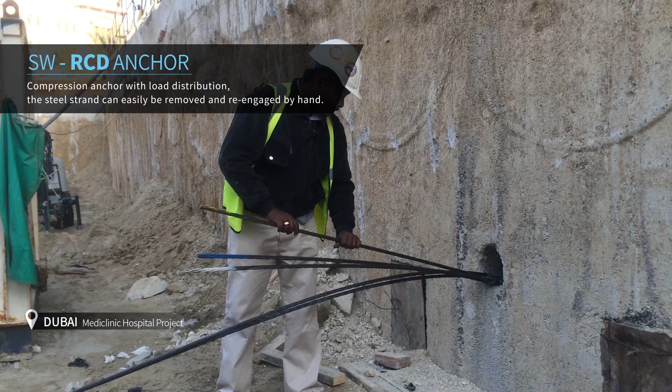Ground anchorage is used at a construction site to support structures using the tension of steel strand in sheeting and shoring at a work site. SW-RCD Anchor is a removable anchor with the steel strand that can easily be removed and re-engaged by hand.

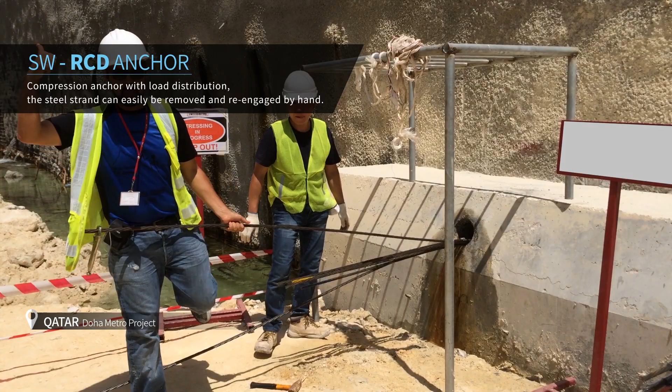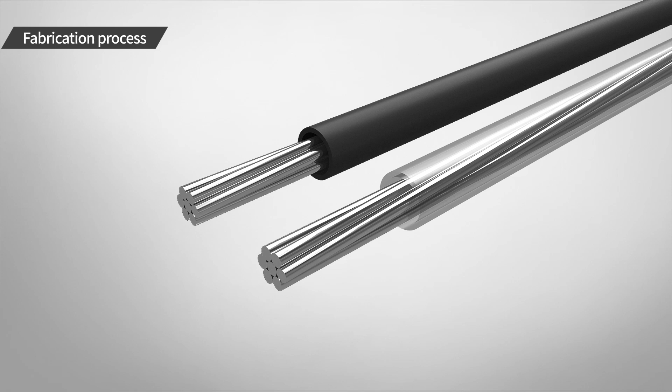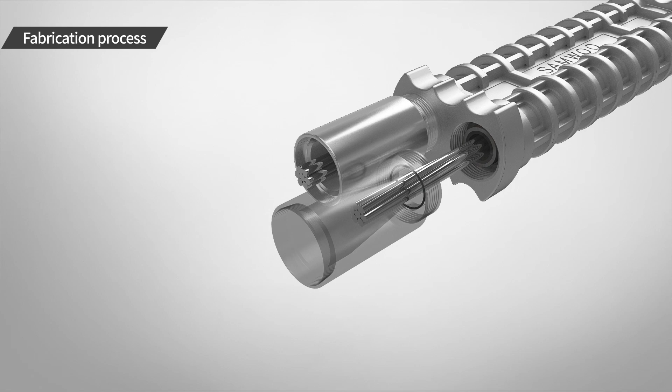RCD Anchor is a removable compression anchor with load distribution. Its composition and removal method are as follows. RCD Anchor consists of steel strand as a tension member, corrosion-resistant aluminum die-casting anchor body for load transfer, PE ring for waterproofing, and anchor block for holding removal wedge.

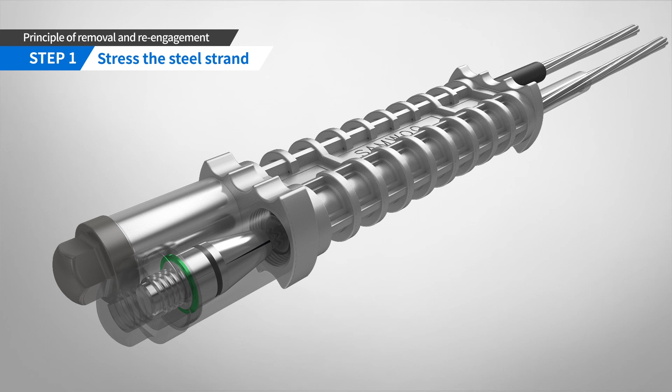To assemble the product, first the wedge is inserted into the anchor block to fix the strand and then fixed by a screw cap. When the steel strand is tensioned, the safety ring for preventing the recession of the wedge will be removed in the direction of screw cap, and the steel strand will be fixed with the removal wedge in the anchor block.

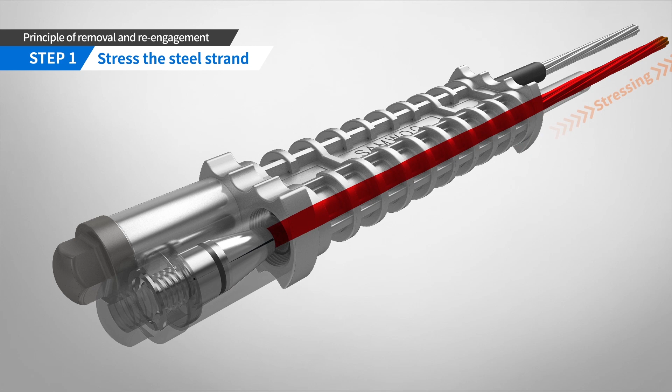The steel strand can be removed as follows. After de-stressing the steel strand, rotate the steel strand counterclockwise to release the wedge from the anchor block and open the wedge. Then, remove the steel strand by hand.

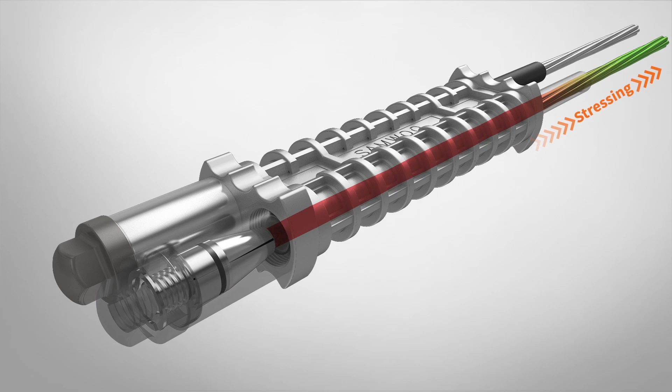If replacement of damaged steel strand is needed, you can re-engage the steel strand. For re-engagement, insert a new steel strand into the RCD anchor and rotate it clockwise to re-engage the steel strand with the removal wedge. Then, you can re-stress the anchor. Samwoo produces lineups of RCD anchors suitable for diverse anchor body combinations according to installation site requirements.

The load transfer mechanism of RCD anchor is based on the load transfer mechanism of the compression anchor. The ground anchor is largely classified into tension type and compression type according to technical criteria. The load transfer mechanism for those anchors is as follows. For tension anchors, during the stressing process, load will be applied via the steel strand, and the load will be transferred to the grout through the bonding area between the bare strand and the grout, as a result delivering load to the ground.

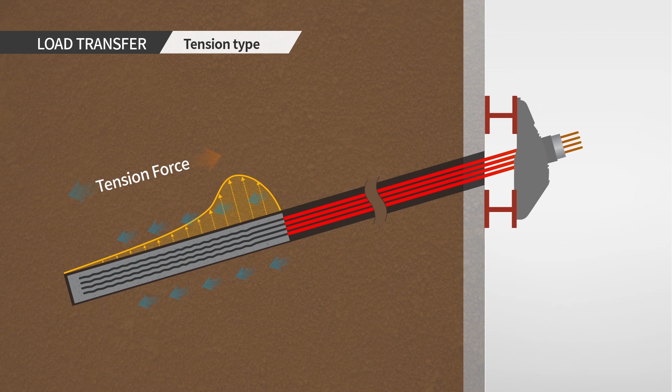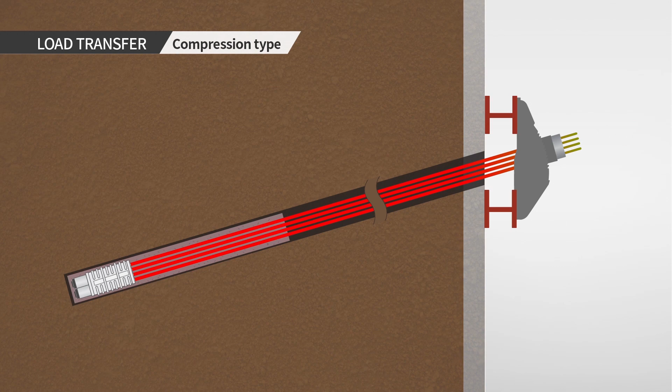For compression anchors, during stressing process, the load will be applied via the steel strand and the load will be transferred to the grout through the anchor body by the compression to the grout, hence delivering the load to the ground. For these anchors, there will be higher load concentration on the load transfer area of the bond length, hence causing anchor failure due to progressive debonding or the grout failure.

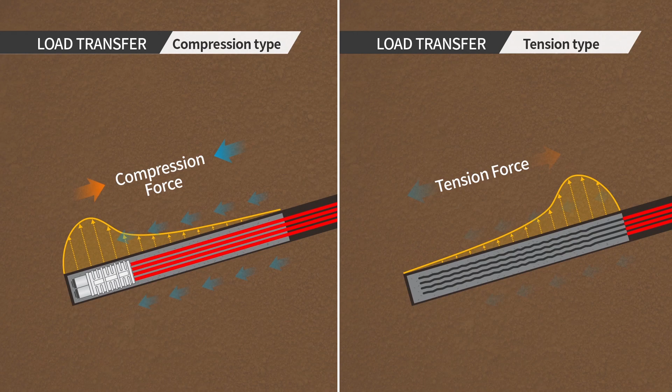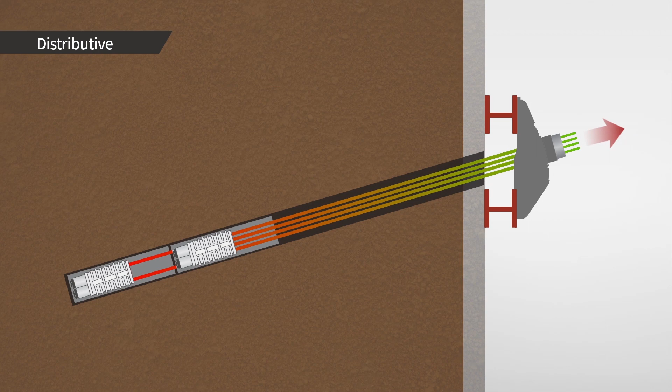Samwoo RCD Anchor is an effective anchor system with better performance to minimize these problems since the load is distributed to several anchor bodies and load can be transferred evenly throughout the whole bond length of the RCD anchor with load distribution.

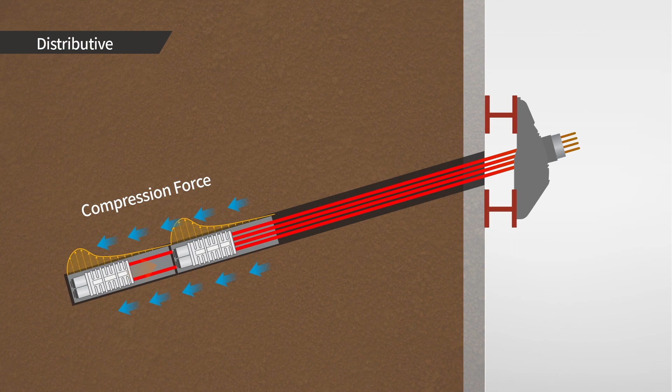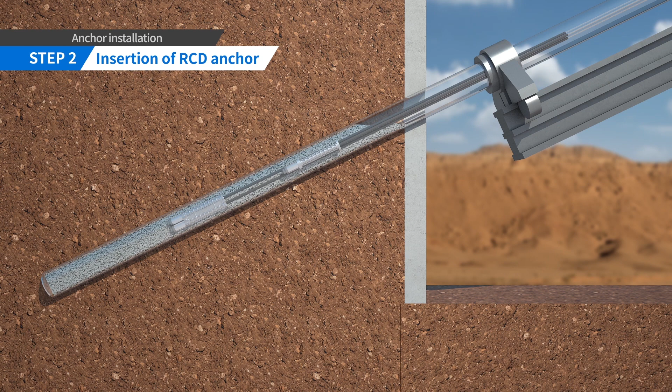RCD anchor is installed in the following procedure. Using a drilling rig, drill a hole. Then inject grout into the borehole. Insert the anchor into the grouted hole and pull out the casing. Fill up the space of the borehole with grout.

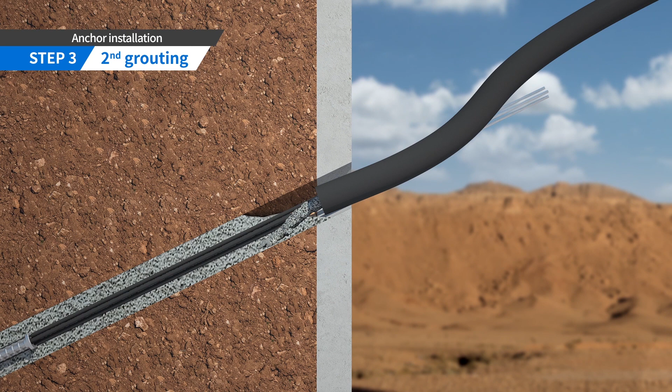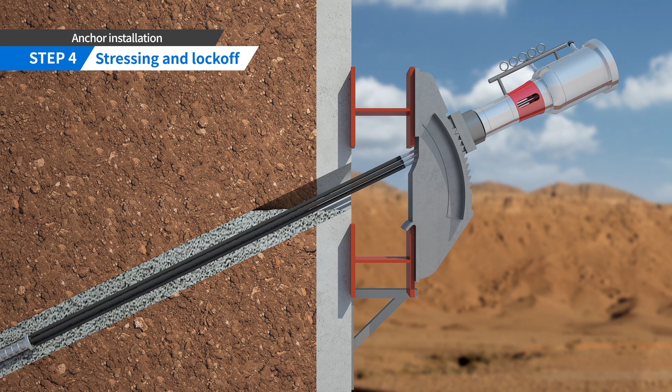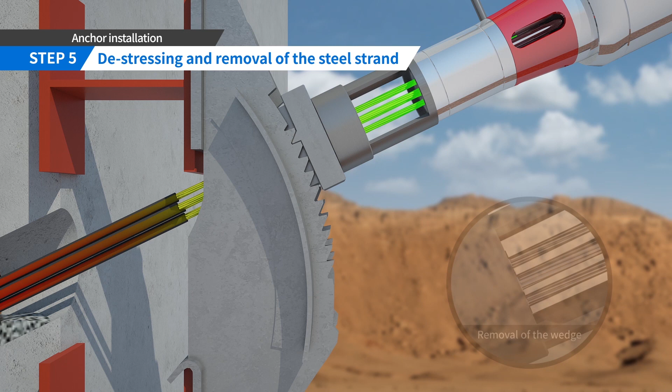Mount the bracket with the whaler beam, install the anchor head with wedges, and stress the anchor using a hydraulic jack. To remove the steel strand, de-stress each steel strand of the anchor using mono jack and steel chair. Then, rotate the steel strand 2 to 3 times clockwise and pull out the steel strand from the anchor by hand.

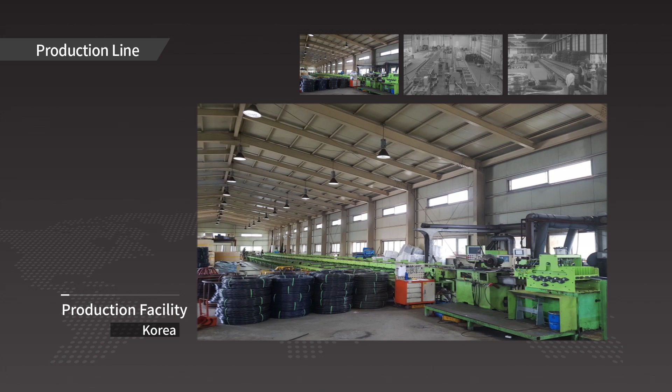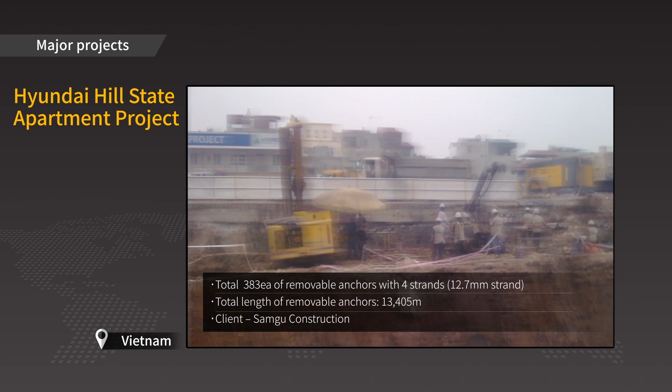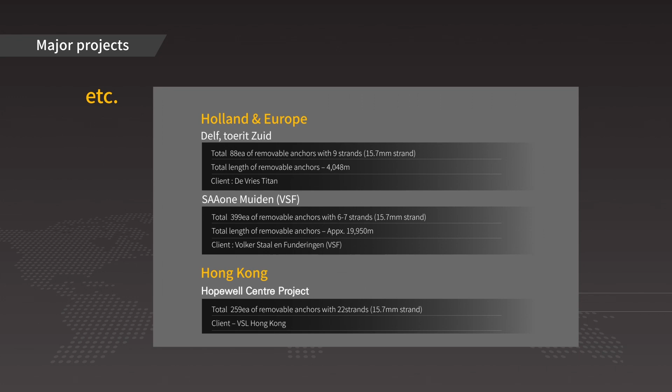Samwoo is a manufacturer and supplier of high-quality anchor products to international clients from its semi-automated production facility with the biggest production capacity in the world. The excellence of SW-RCD Anchor has been recognized from construction sites of various geological conditions all over the world, and we believe that it has been recognized as the best removable anchor in the geotechnical area. Samwoo will continue its research and development in more advanced anchor technology for our clients' satisfaction.